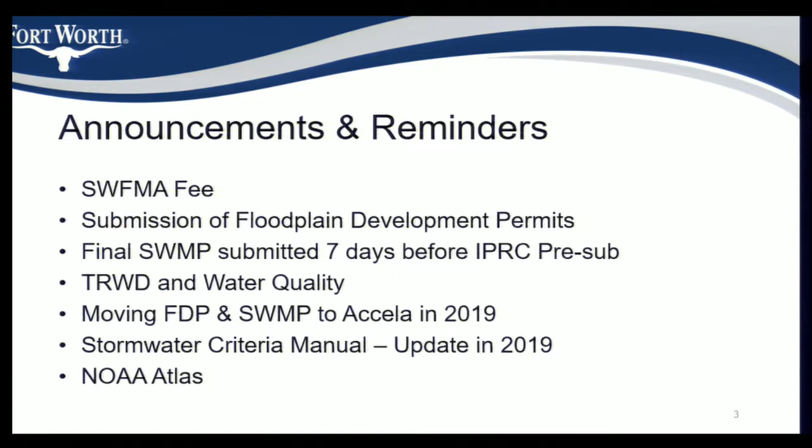So the new maintenance agreement recording fee is $635. You need to bring a check made out to the City of Fort Worth with the 3 original hard copies that you submit to the Planning and Development Department. We'll continue to provide review of the electronic exhibits ahead of time to try and make sure that when you actually get to the point where you have to record your maintenance agreement, it moves smoothly.

There is a procedure and a guide available online. Make sure you write down that link. If you have any questions, you can email us at swifma@fortworthtexas.gov.

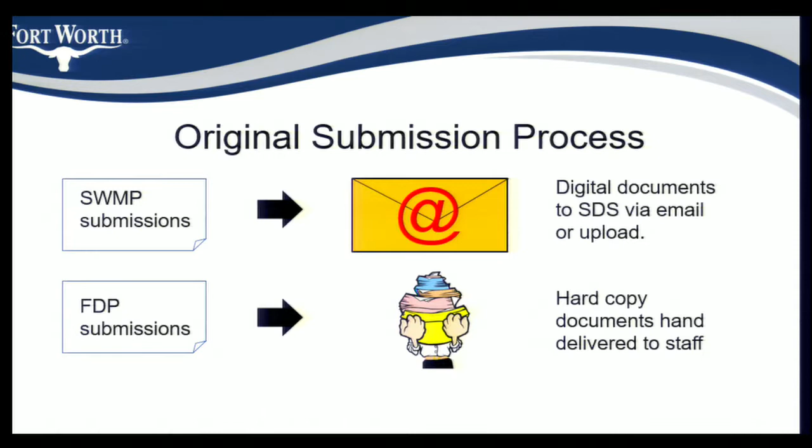So about the middle of August, late August, the Stormwater Development Services Group started accepting the iSWM as well as the floodplain development permit. Previously, you had to submit all your floodplain development permits hard copy to the floodplain team. As of August 20, you can email it to us, or you can send us a link to download it or upload it to Buzzsaw the same way you would an iSWM plan.

At least the processing and submittal process should look and feel like a stormwater management plan. So we're basically going electronic with the floodplain development permit at this point. It's being tracked the same way that we track stormwater management plans.

I did want to just touch on how those two submittals come in. Make sure you don't combine them in the same PDF. If, for example, the floodplain development permit is an appendix to the iSWM plan, our tech won't catch that, so you might end up delaying yourself by not making it clear that they're two separate submittals. It just comes to the same team now.

As of October 1st, I think, actually let me back up a little bit. So there was a group of people that were getting together to talk about the infrastructure delivery process, so all of the developer-led infrastructure improvements. There's been an ongoing coordination, I think a Six Sigma project, to find improvements and compress the time frame in which you can get in and out and get to construction.

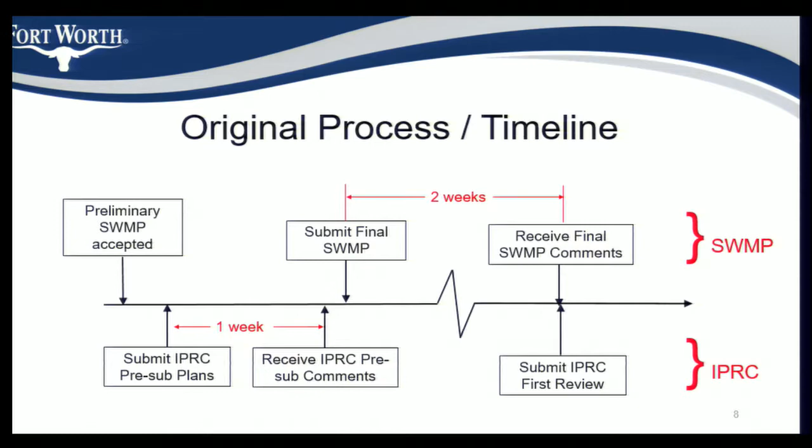One of the items that came out of that was having the preliminary storm management plan accepted and the final storm management plan submitted 7 days before pre-sub. Previously, it was just the preliminary storm management plan, and then you could move on to pre-sub. But the way it's working now, and we've been giving a bit of a grace period, so you probably have received a reminder if you haven't met that criteria.

So from here on out, it'll work more like this. So accepted preliminary and a final submitted 7 days before pre-sub. And the idea here is that if the timing works out, then you'll actually end up with pre-sub comments and final plan comments about the same time.

It also allows us opportunity to take a look at any updated models or additional information that's in the final and provide a more informed review of your infrastructure plans. Hopefully what this means is less compliance reviews at the end of the process and a faster route to construction.

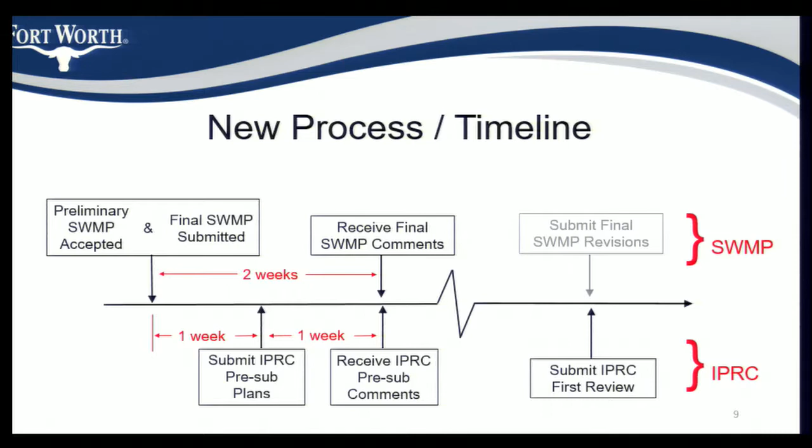So if the timeline that I sketched out there was a little confusing, the main takeaway is that preliminary needs to be accepted and final needs to be submitted 7 days before IPRC pre-sub. That's the main shift. Everything else, all the other links between storm management plans and infrastructure plans, remains the same.

Part of that process shift, I also hope, means that we can draw a better distinction between infrastructure plan review and storm management plan review. What we often see is a complete civil set submitted with the final iSWM plan. But if we're reviewing your final iSWM plan and your infrastructure plan set, we don't need to be doing 2 reviews. You don't need 2 sets of comments.

So as best we're able to, we'd like to see the construction plans move through IPRC, and more of the H&H modelling, more of the concepts and the exhibits in the iSWM plan, if that helps.

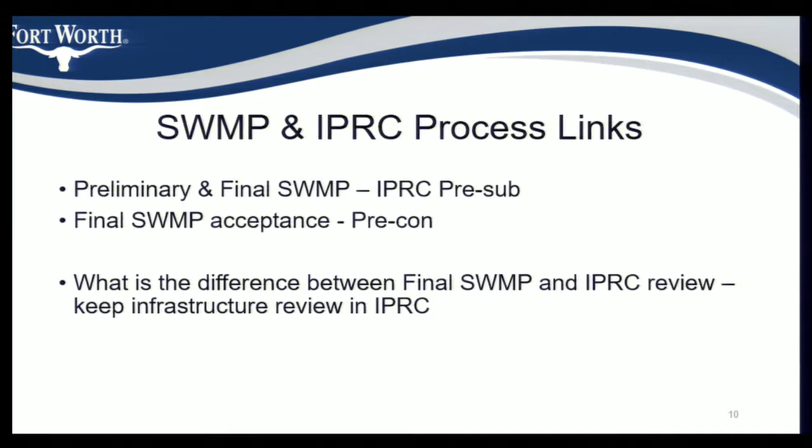So the Tarrant Regional Water District has published their stormwater, their water quality guidelines. I just wanted you to be aware of this because they've made a shift from grey infrastructure, things like Stormceptor units, to green infrastructure. And so when you're laying out your project site, you need to consider that green infrastructure, those bioswales or those other elements, as part of your early site planning work.

If you have any questions about the TRWD water quality requirements, there is the guidance document, but you can also contact Brenton Dunn with TRWD.

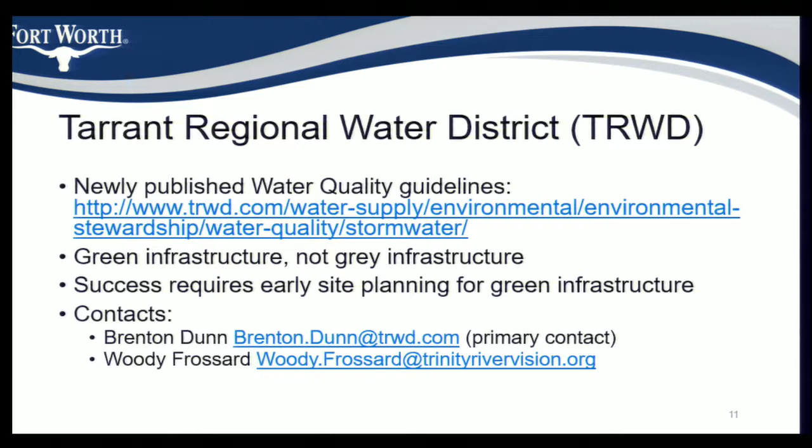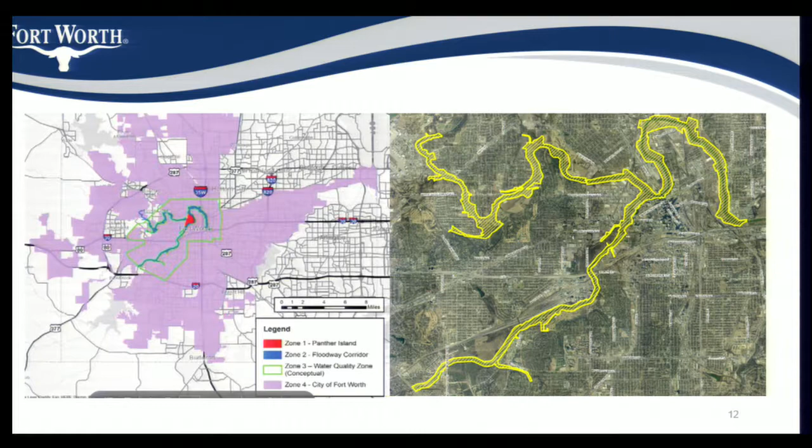There's a general process for just their water quality review. I know some of you probably have other questions about permitting new outfalls and that overall process, but just for the water quality review, they would like to see that you submit a concept plan, just a site plan with your location of your green infrastructure, and then work with them to find consensus on that concept plan.

Once you get to that point, agree on a concept, move forward to the detailed design calculations. They, of course, need to be signed and sealed by a PE. You might need to work with the landscape architect to refine some of that design. Once you reach approval of the design, obviously they issue your permit as long as everything else is in place.

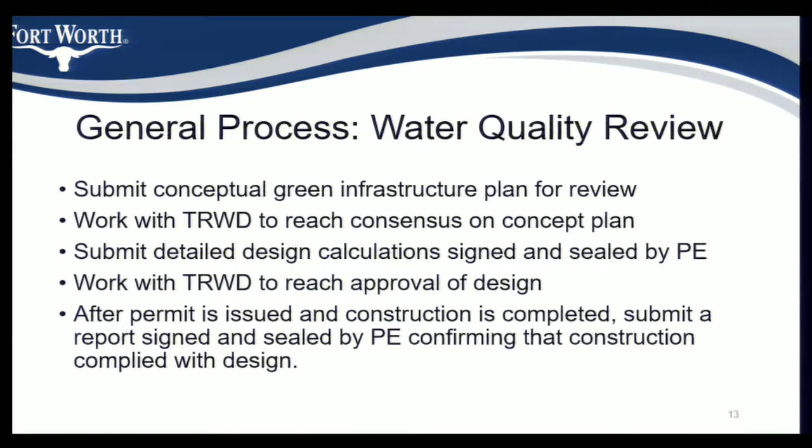But once the permit's issued, you still need to go back and submit a report confirming that the construction was done in compliance with the approved plans. If you have any questions, again, reach back to TRWD and they can provide additional guidance or direction on how to do that.

So just briefly, we are trying to move most of our permitting activity, most of our review activity to an Accela platform. The idea being that you can submit your documents online. It gives you a clear path on how to get through the process. There's workflows. It's structured for performing reviews.

And so we're looking at shifting most of our work to an Accela platform, building on the success that IPRC has already had with the infrastructure plan review work.

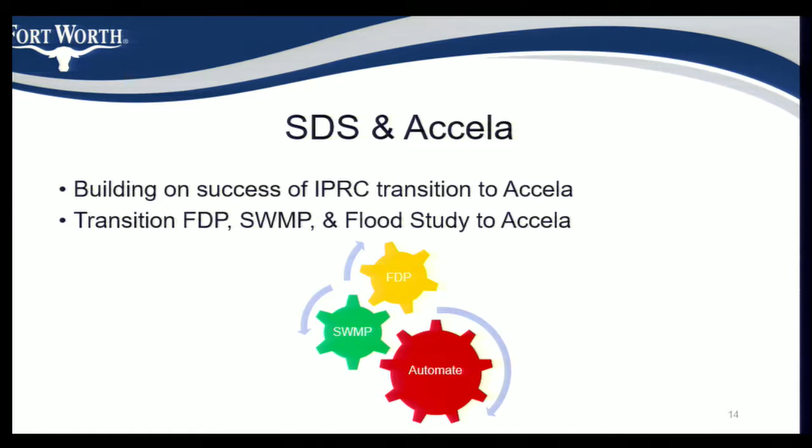We do plan to update our stormwater criteria manual in 2019. There's really just some refinements and clarifications we're looking to make to that. But if you have any feedback that you want to offer, then you can contact myself, Clair Davis, or send us an email at sds@fortworthtexas.gov, and we'll add that comment or that item to the list of things we're looking to address.

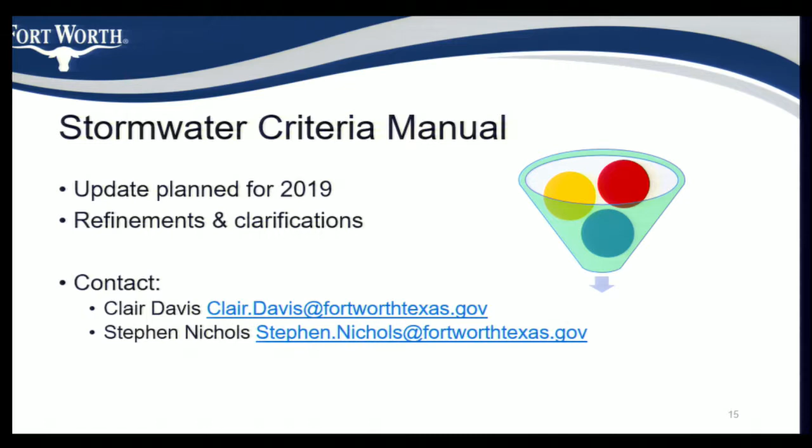Of all the possible updates, it's probably the local floodplain policy that we're currently working on that would have the potential to make more substantial changes to that manual.

You might have already heard, but the NOAA Atlas 14 for Texas is now available. The rainfall intensities in our area really haven't changed much. They're marginal at best, a tenth of an inch here or there. It's really areas in Austin or the coast that have substantial changes to their 100-year rainfall depths.

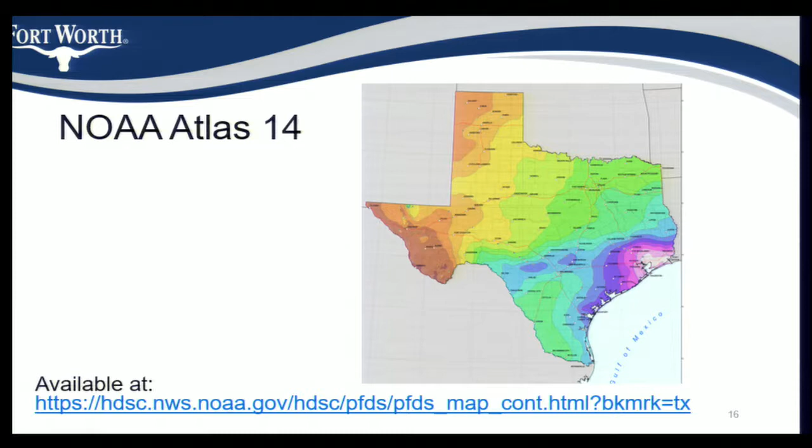Stormwater works with a group we refer to as a Stormwater Liaison Committee. It's made up of a handful of developers and engineers that work with developers. When we have concerns, questions, or want to bounce ideas off people in the development community, we take things to them and discuss it. One of the things that came out of that committee maybe a year ago was the idea of trying to find out what causes a review iteration.

We in Stormwater Development Services have been able to turn things around pretty quickly, typically within a 10-day goal, but then how many review iterations is appropriate? Is it 2? Is it 5? 5 seems high, maybe 2 is reasonable. But the idea was we want to focus on reducing the number of iterations we have.

So we worked with the liaison committee to come up with the idea of taking a sample of 20 civil plan reviews, a mix of final, preliminary, and construction plans. We had 2 consultants look at these independently, one selected by the city, one selected by the liaison committee group. We evaluated these reviews to try and figure out what caused that review iteration - is there something we can do to change the way we're doing business to reduce the number of iterations? Ultimately, the idea is that we're saving time and money for both the community and ourselves.

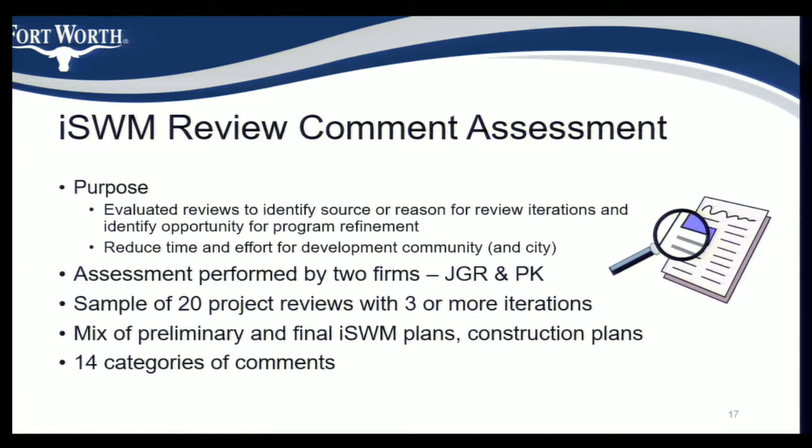Of the sample 20 projects, each of these exceeded 3 review iterations. Most of the firms represented were people that we do business with almost on a daily basis. A few of them we don't see so often, and the one-time customers are probably folks from out of town or out of state.

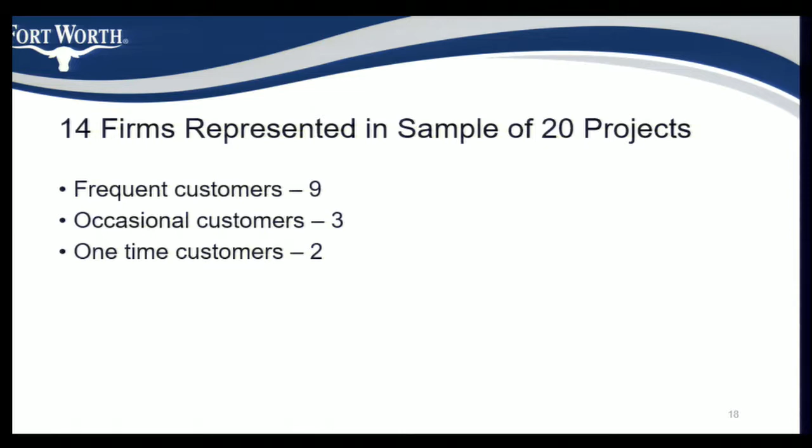A summary of the findings from those 2 reports, which are available if anyone wants a copy: they found that in almost all projects - actually all projects - were affected by previous comments not being addressed. Almost all of the projects were missing data that would have been required to complete the review. And a little over half didn't meet our standards or had design errors on plans.

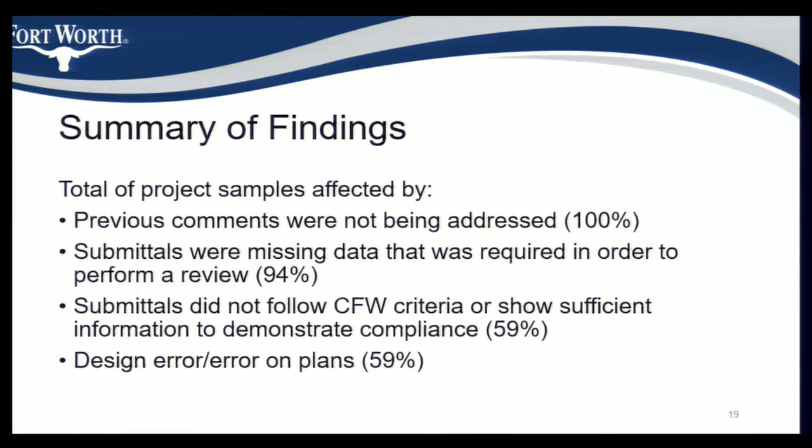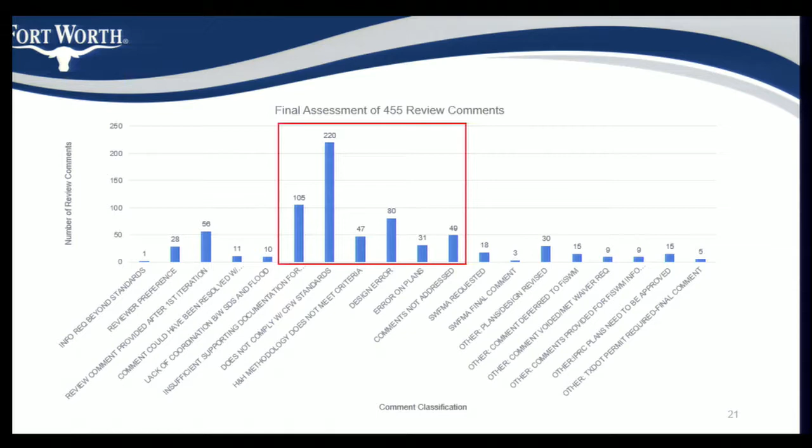So where that's leading me is our examples. You can see that about half the comments across all the reviews fell into 'doesn't comply with standards,' and that's why I end up with this comment. I'll let you quickly read through that, but I think you get the idea.

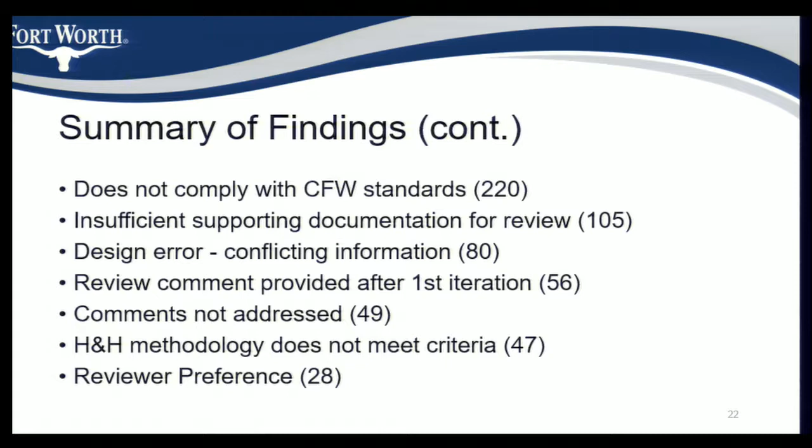So with that in mind, we've prepared a series of design standard examples, things that we see most commonly. Almost every infrastructure plan set that comes in has comments that relate to these items. Erin's done a great job of putting these examples together for us. As our Stormwater Development Services liaison with IPRC, she's probably at most of the pre-sub meetings.

So manhole locations are obviously important for access and maintenance. As design engineers, you're designing infrastructure that is ultimately handed over to the city, at least if you're working within the IPRC process. And so we need to make sure that we can access, clean, maintain, and operate the system moving forward. Manhole locations are important to that.

Something that's come up recently is concerns about manhole locations at the upstream end of the storm drain system. There's been some debate over what constitutes access at the upstream end. Often an inlet is okay for a short run, but usually within 100 to 200 feet of that top inlet, there needs to be a manhole added.

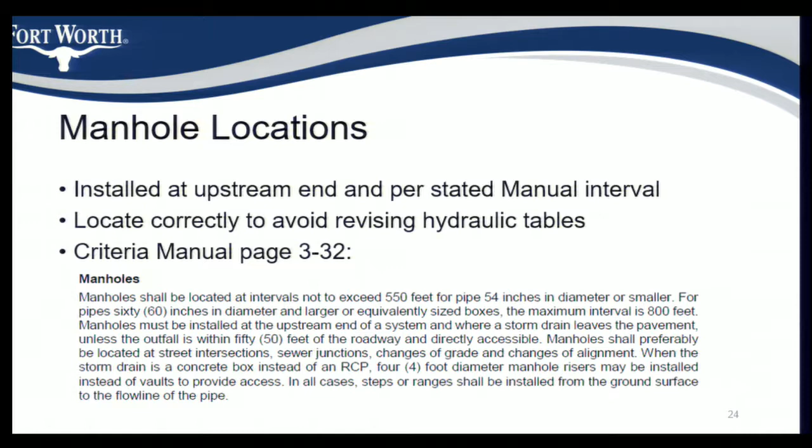I haven't added this to the presentation, but the ability to retrieve that hydrojet head is also tied to Fort Worth's approach - what people have referred to as unusual - of matching flow lines in our storm drain systems. By matching flow lines in our storm drain systems, it makes it a lot easier to retrieve the hydrojet head as well as the camera equipment.

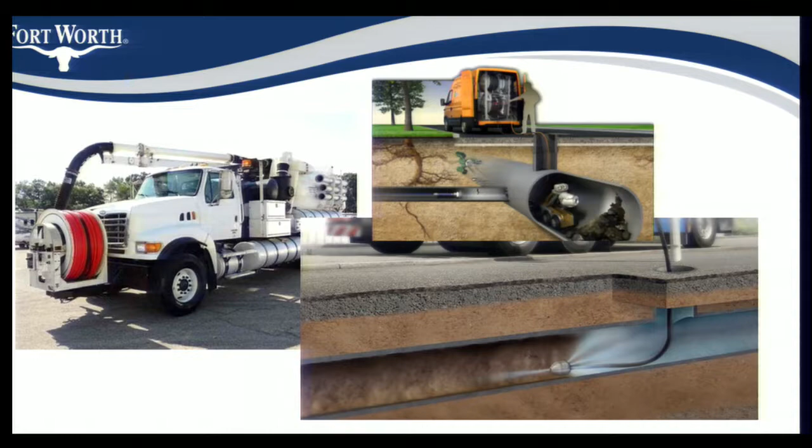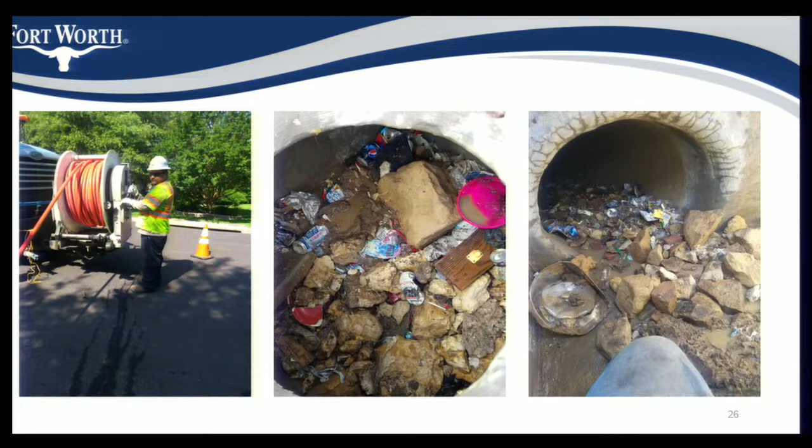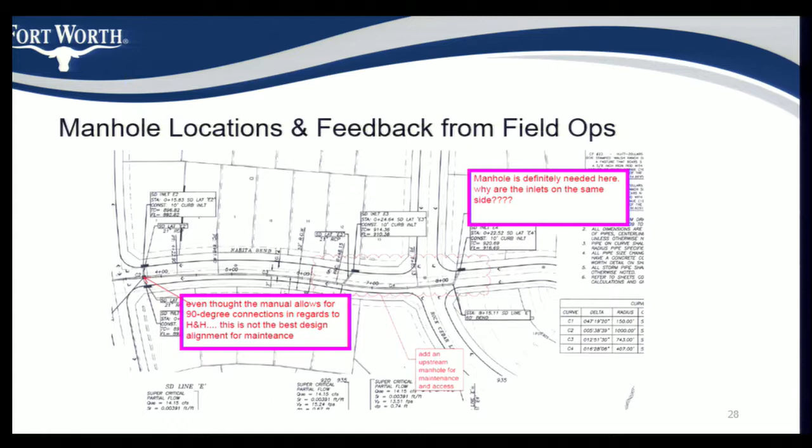This is similar but slightly different. Our field ops provided feedback about this configuration and indicated that moving the jetting equipment through this bend here was more difficult, and therefore they would like to see a manhole at that location. So the point I'm trying to make is how you define a manhole being required at the top end of a system kind of depends on the design of that particular system. And again, it's tied to our ability to maintain, clean, and operate that storm drain.

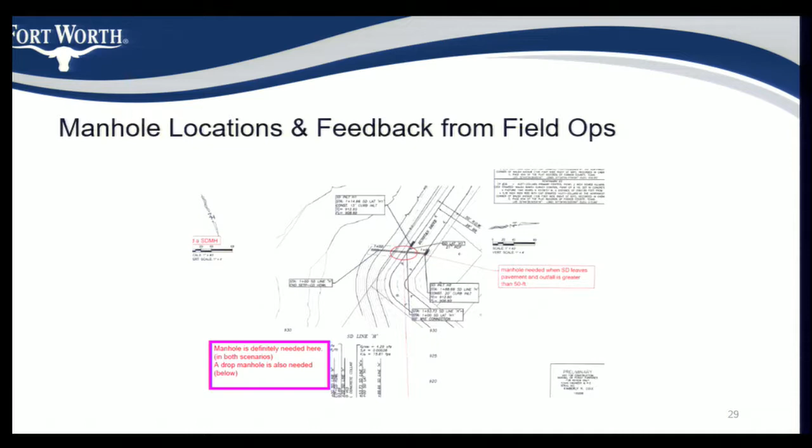We also need a manhole located usually within the pavement, or certainly within 50 feet of the pavement, where we have an outfall that's difficult to reach. This is a good example where you've got probably a 20-foot drop to the flow line. That would also need to be a drop manhole to make that work, I think.

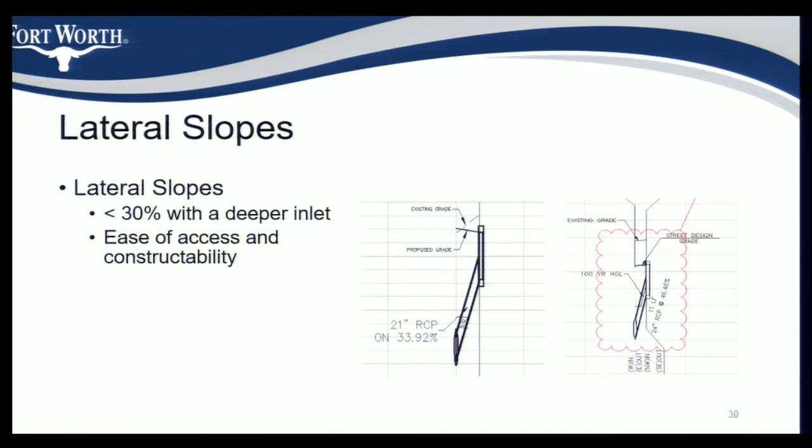On lateral slopes, we don't have a specific published criteria for this, but working with our field engineering and field operations, the upper limit is really 30% on your laterals, both from an access and a constructability standpoint. We did have one come in at 75%, and our field engineering guys told us they really couldn't even retrieve their camera equipment from that. Is that right? Yep.

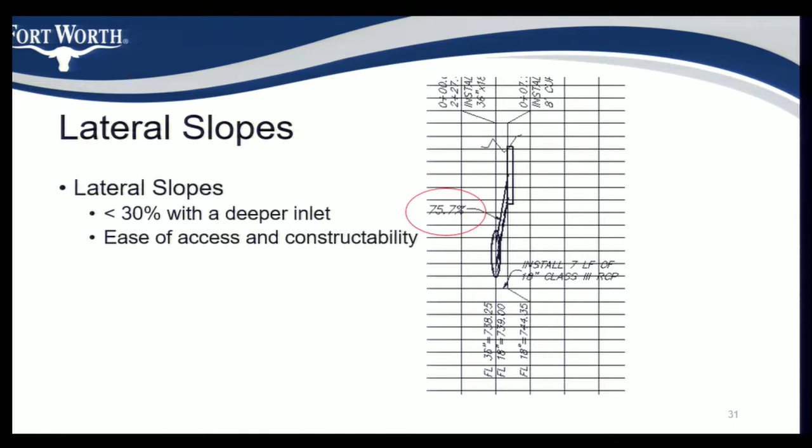I hate to use the word pet peeve, but it might be one of mine. The lateral connections, I think every single plan that I've seen first time, they come with a lateral connected at the center of the inlet. I don't know if that's because it's easy to draft that way or that's just the way it makes sense to the designer. But City of Fort Worth inlets, our standard 10-foot inlet has 2 access openings, 1 at each end.

So the idea is that the lateral connection needs to be plumbed in, aligned with the access opening, so that when our field op guys are out there trying to get that jetter hose through, they've only got one vertical 90-degree bend to move through, and they don't have to get that hose through a vertical and then a horizontal 90. It makes it difficult to push the hose through and then retrieve it.

Our standard inlets on new infrastructure are 10, 15, and 20 foot. The manual does make reference to a 5-foot inlet. One of the reasons that the 5-foot inlet is in there is because it's not just development projects that use our manual, it's also used on CIP projects. Citywide, this is our stormwater criteria manual.

Based on some analysis, some modeling, I think they actually used an InfoWorks model in Central Arlington Heights, they determined that all the street projects that were going in and rehabbing the pavement and adding 10-foot inlets instead of the 3 and 5-foot inlets that previously existed, that work was actually moving flooding problems around from one location to another.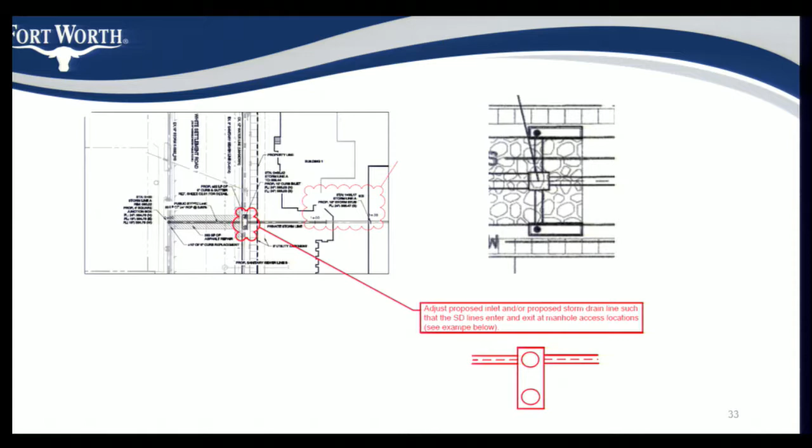This is actually on my drive home. This is a 40-foot inlet. A 40-foot inlet's also not really a standard size.

A little bit on lot grading. I won't go into too much detail. Maybe a year ago, Greg Simmons had led a conversation, a series of meetings about how we interpret our lot grading standards and how we're going to apply those moving forward. The findings of all those meetings were published in our April newsletter.

But most of the contention was around having to provide a drainage facility in the middle of the block where you have a type B or type C that drains to the rear, and providing a drainage facility along the common property line.

Our manual does define type B as breaking at the rear building line. That's also consistent with the original 1970s HUD guidelines. The main difference there is that house sizes and shapes have kind of changed in the last 50 years, and so that rear building line is actually a lot closer to the rear property line than what it used to be.

Anything that's closer to the right-of-way, closer to the front building line, we really consider more of a quasi type C configuration, just because you have most of the impervious cover or the rooftop draining to the rear.

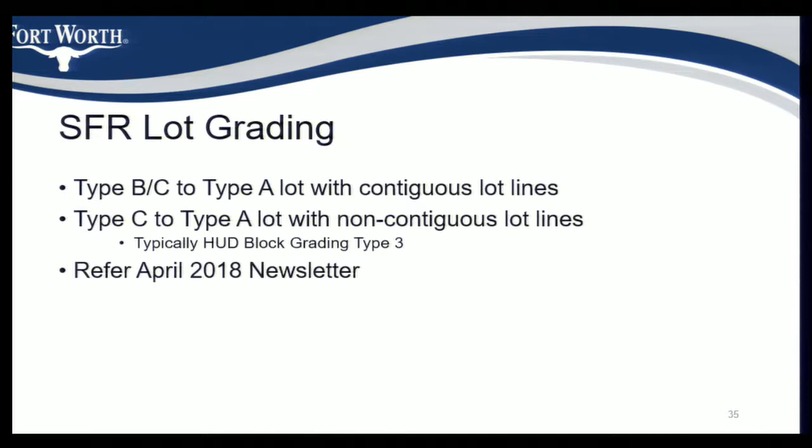So I guess this is an example of the kind of configuration we're talking about, but it's also an example of the contiguous lot lines. And so where we do have the break at the front property line, our standards require the contiguous lot line or the contiguous swale to move through.

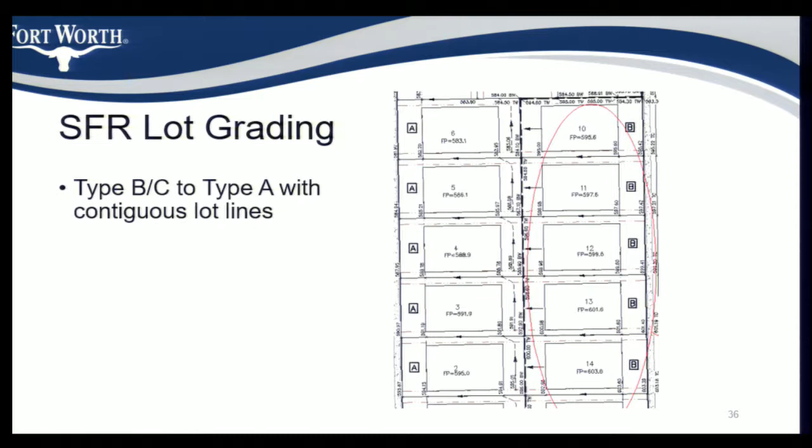What we try to avoid is non-contiguous lot lines. By having them continuous, it's a lot easier to not have a rear drainage infrastructure, some sort of drain or swale, or maybe a swale that someone fills in over a few years.

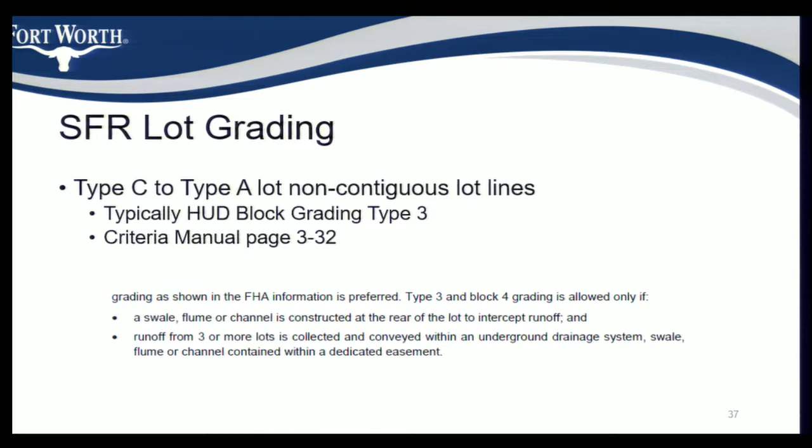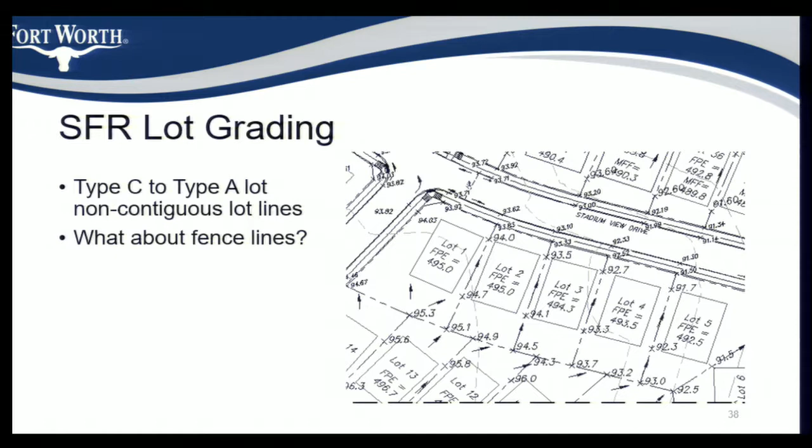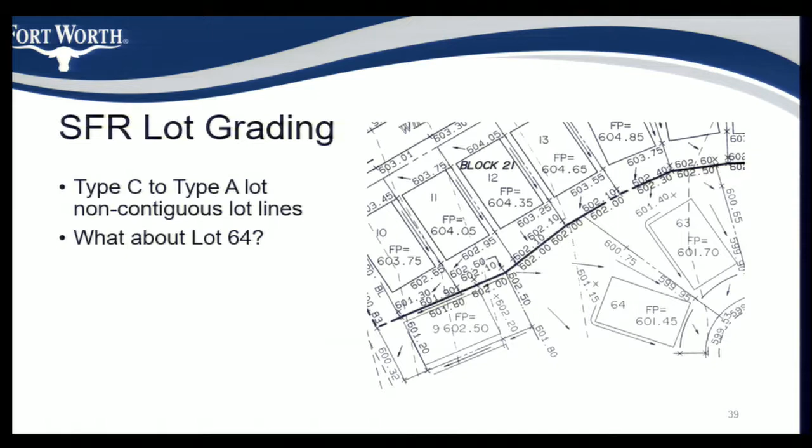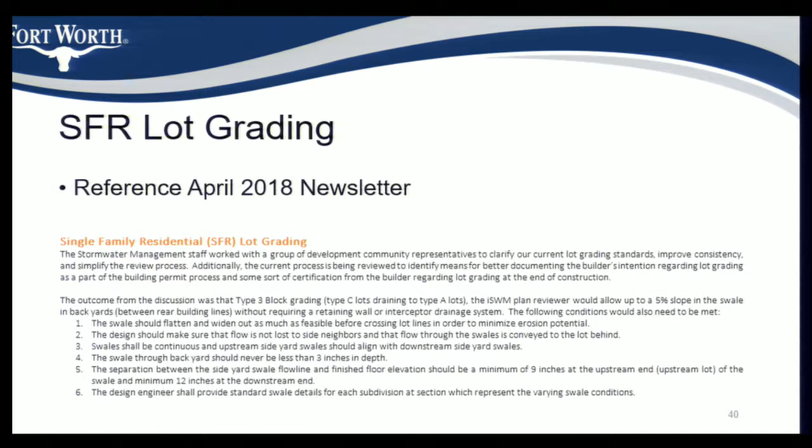I want to talk a little bit about erosion controls at outfalls. This is something that, again, on most plan sets that we see, the erosion control at the culvert or the storm drain outfall is either too short, not provided, or too narrow. It just doesn't really meet general design guidance.

It's also important to evaluate your storm drain outfalls for more frequent events, not just the 100-year. Sometimes the 100-year tailwater masks the outlet velocity or the maximum outlet velocity.

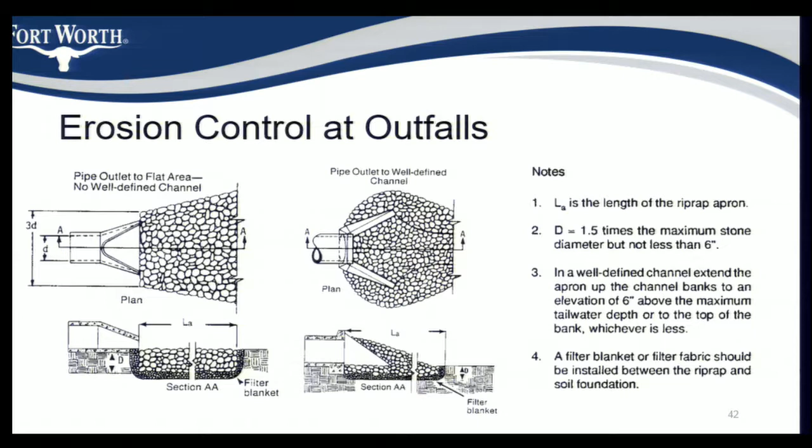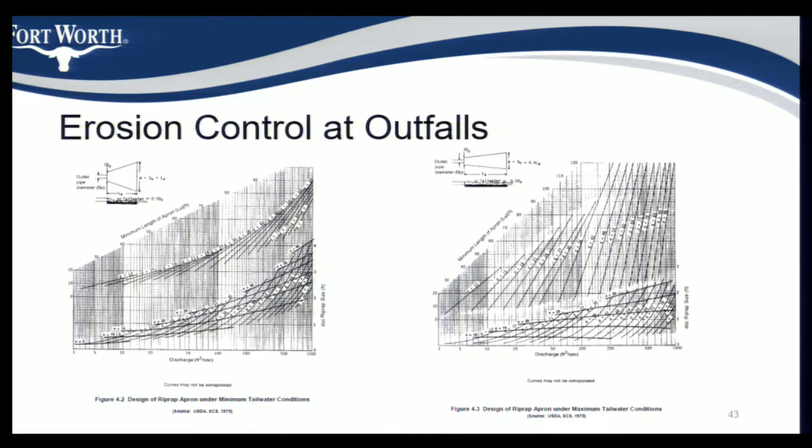The iSWM, the COG's iSWM hydraulics manual, provides specific guidance on the length and width of a riprap apron. I won't read through that for you, but it's out there and available as a design guide. It also provides some nomographs for you to determine the expected length and width of that apron, with some examples of why we might want to see those aprons appropriately sized.

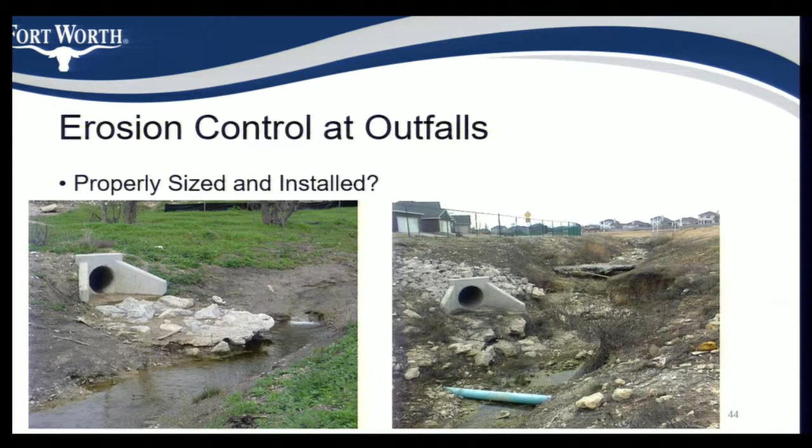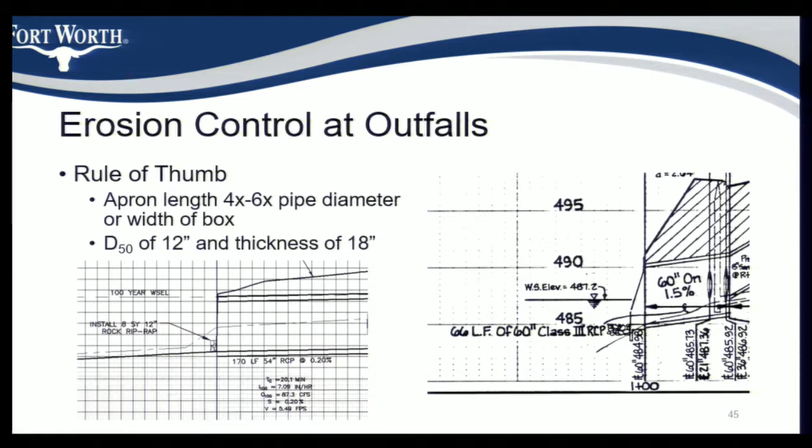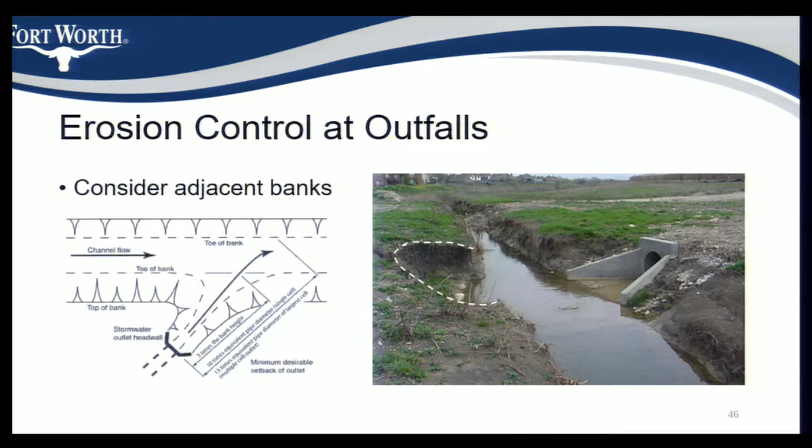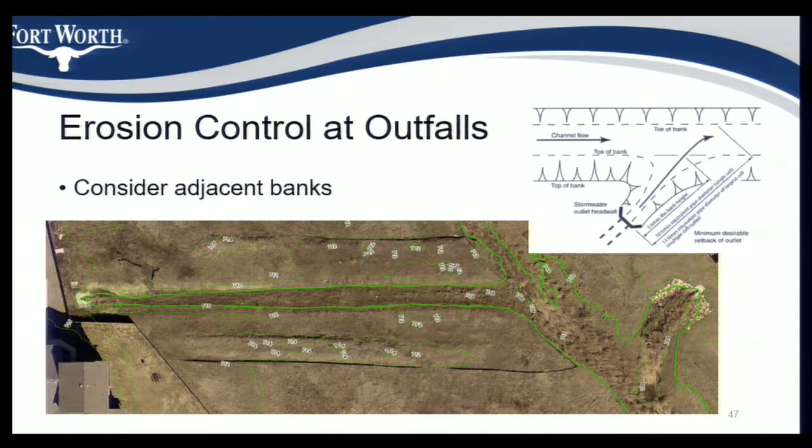Just another reminder to consider tailwaters other than the 100-year storm when you're determining your velocity at your outfall.

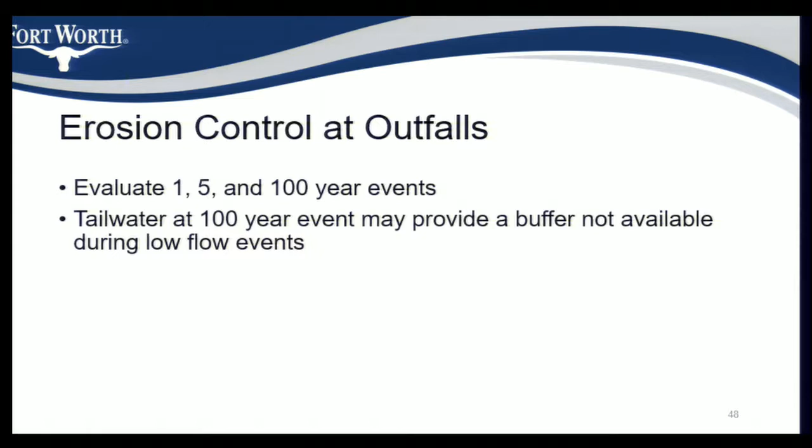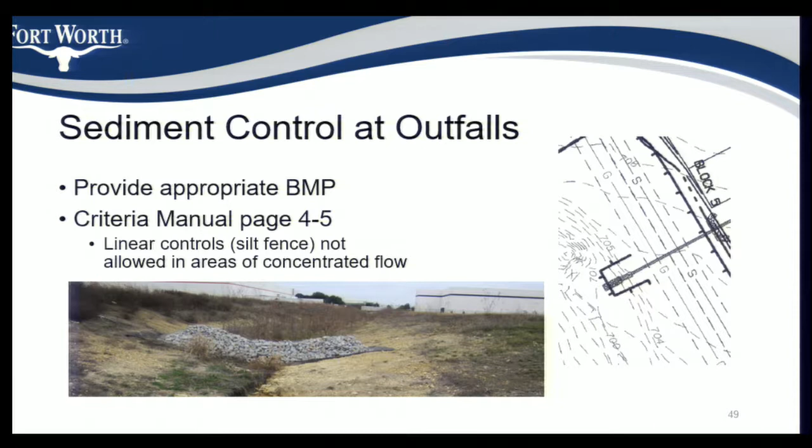We grabbed this example of a temporary sediment control and outfall - just a bit of silt fence around the pipe. Silt fence is great when you've got broad sheet flow, but when you've got concentrated discharge, silt fence is going to fail pretty quick. As you can see in the photo, a rock check dam in an outfall channel from a development is the kind of thing you'd normally want to propose or show at your outfalls. Silt fence is good - these are some silt fence retaining walls, they work hard, but they're not what you want to place at an outfall from a storm drain system.

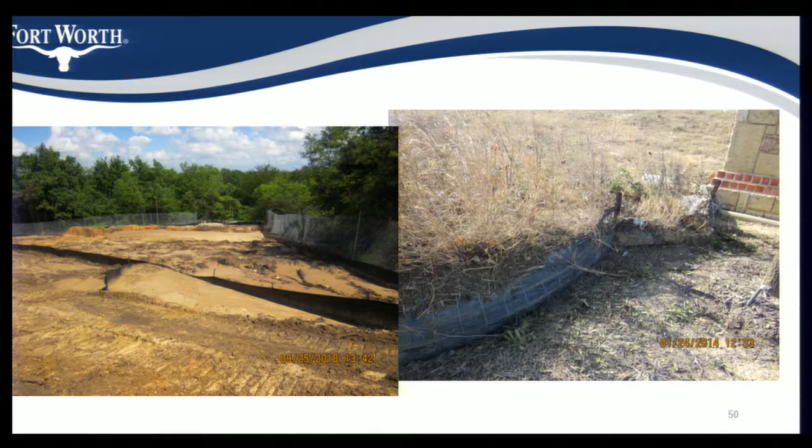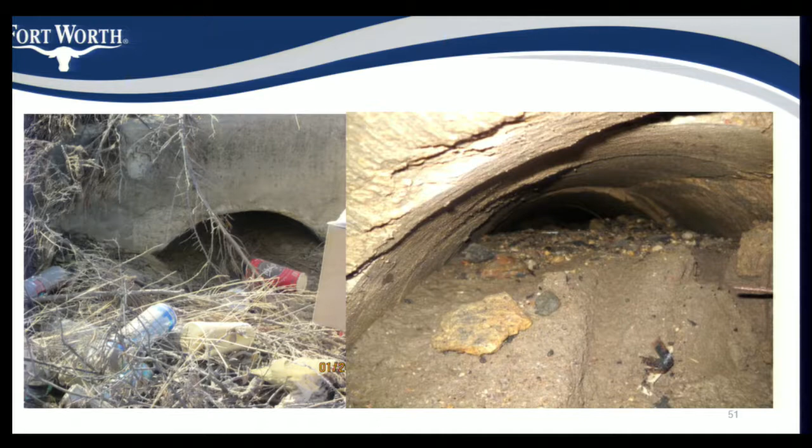One of the reasons we harp a little bit on erosion control is that erosion on your project site typically becomes sediment in the storm drain system downstream of your project, and either your contractor or the city is going to have to clean out that sediment. Here are a few more photos of sediment accumulating at inlets to culverts.

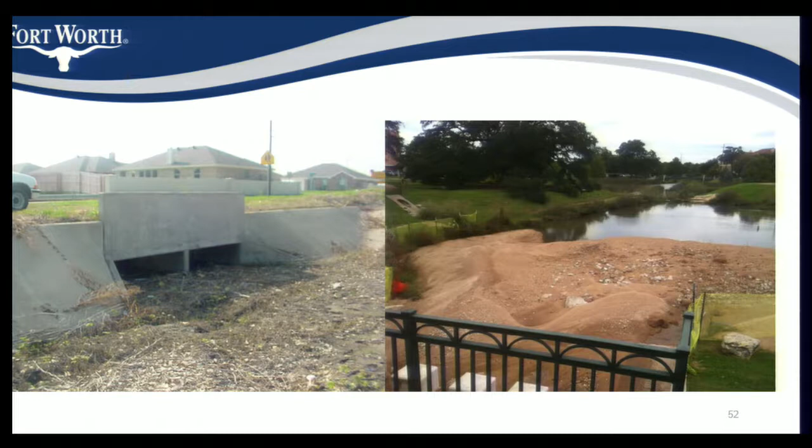We also want to touch on placement of silt fence. On this project, they've placed their silt fence along the property boundaries, and that's pretty typical of a project - to delineate physically the boundaries of construction. But in this case, there was about 13 acres that drained to that point, and the silt fence actually created an obstruction.

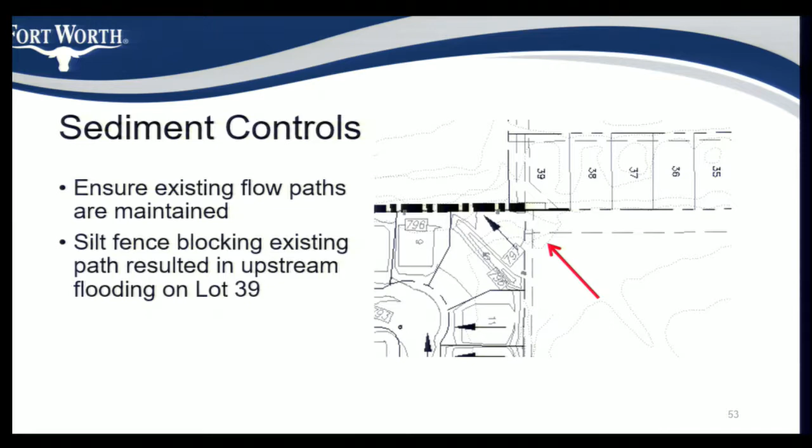We've had the wettest September on record, and October looks to be about the same - in a space of 6 weeks, we got 2/3 of our annual average rainfall. So any flaws in drainage designs showed up pretty quickly, and then someone called the city about it. We went out there, and the silt fence had caused water to pond about a foot deep and then flow through this person's property. They were pretty concerned that their house was going to flood.

Actually, Aaron, can you hit play on that video? Yep.

We couldn't make it to the site during the rain event, so the homeowner was quite happy to take a video for us.

But you get the idea.

It's actually also probably not a bad example of how not to design a subdivision, or maybe forgetting to pick up offsite areas, because there's about 13 acres draining to the property corner, and that's what the silt fence diverted onto his property.

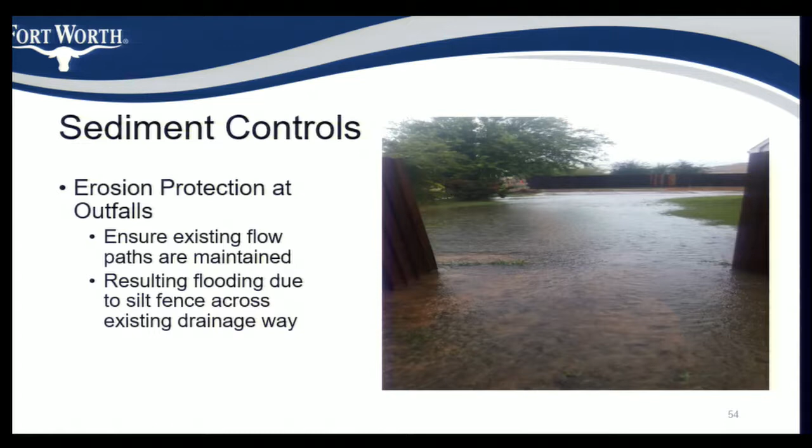You probably hear from us pretty regularly through your IPRC plan design that we need you to take your storm drain outfall to the flow line of the creek, or at least manage your runoff from your outfall to the receiving stream to make sure there's not a substantial erosion problem.

So what we're looking for is to manage that erosion potential all the way to the flow line of the receiving stream, or all the way to the adequate outfall.

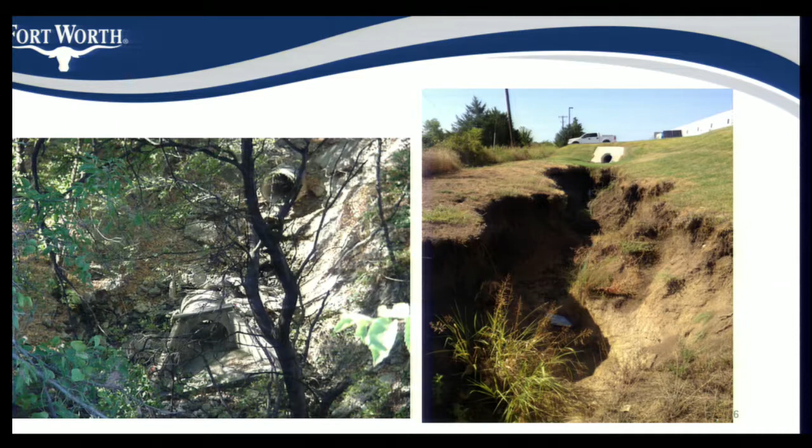This probably wouldn't work. It probably would look a little bit more like that after some period of time, either having eroded the downstream embankment or maybe the headwall's fallen off. One of the reasons we typically talk about taking your runoff to the flow line is because we have plenty of examples around the city where not managing that erosion control all the way to the flow line has caused infrastructure failure.

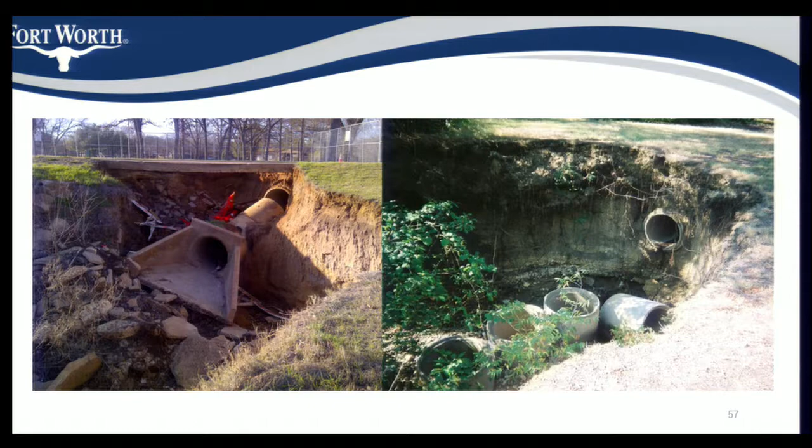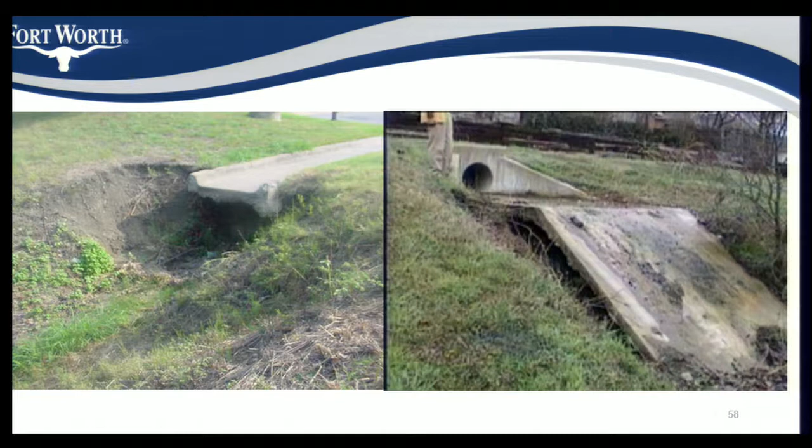It looks like they attempted to manage their erosion control to the flow line on the right. Maybe some curbs on that concrete apron would have helped. Just an example of the kinds of plans; this is actually a good example. They've taken the outfall to a fairly flat grade to a drain swale.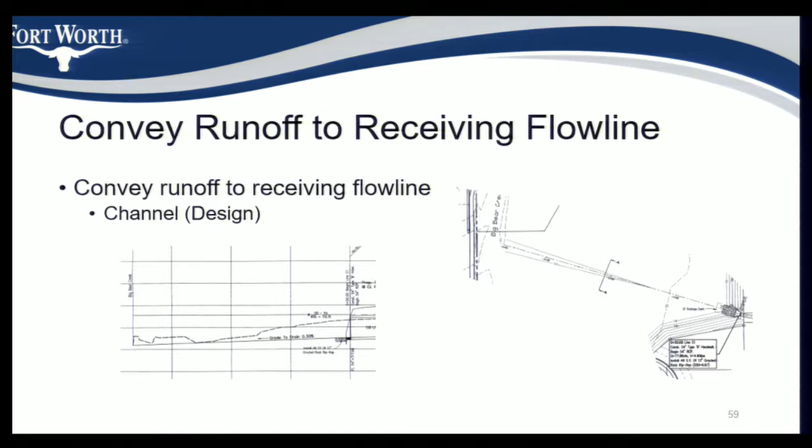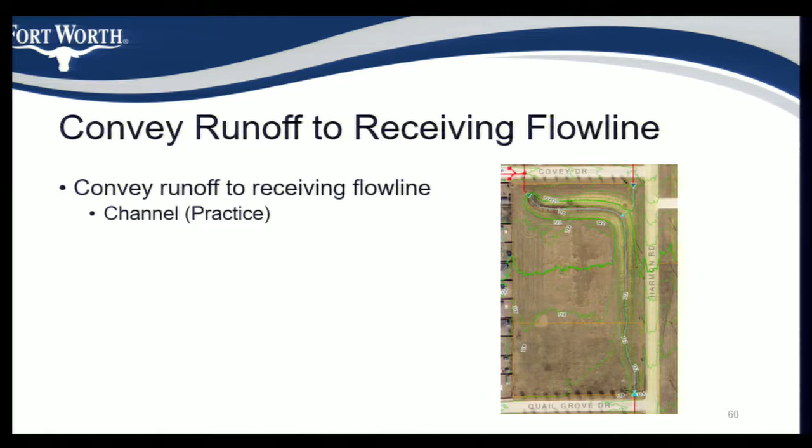It's probably not the best screen capture. It's a little small on this slide, but you can see they've taken a channel. They could have just outfalled, but they've actually taken a channel and directed it appropriately to the next pipe. And that way they've actually managed that flow fairly well to their outfall.

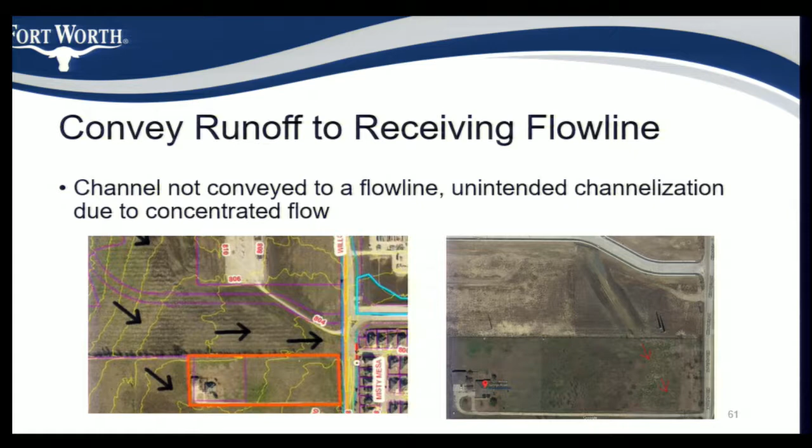The property owner was actually pretty reasonable about it all, and I think the development's working with them to resolve that. But just something to keep in mind, taking your concentrated flow to a concentrated outfall usually makes it easier. Just an example of some erosion that's occurred because the downstream system or the erosion potential wasn't managed.

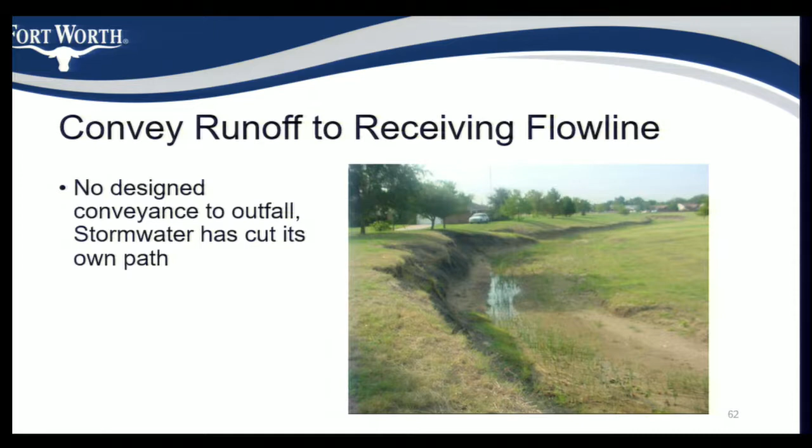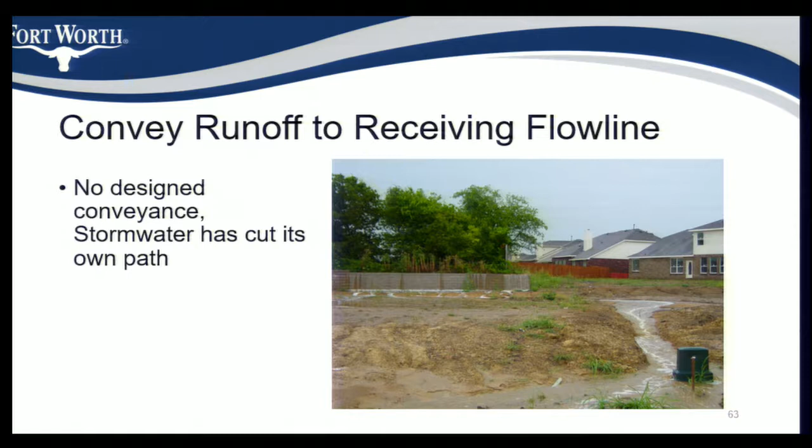Similar sort of deal. The outfall was upstream of this, and you can see that in this picture, you really just have uncontrolled overtopping and then runoff. In aerial, you can imagine in pre-developed conditions, it was just a field. After development, they've installed their storm drain systems, they've collected it and concentrated and discharged on the field to the north, and that runoff has cut its own channel.

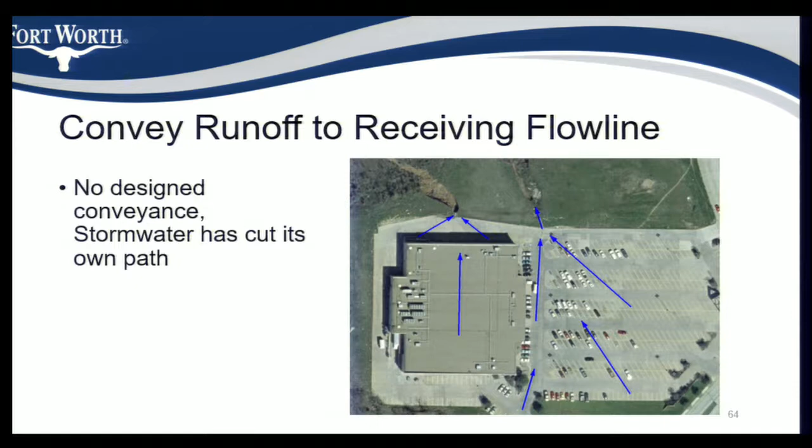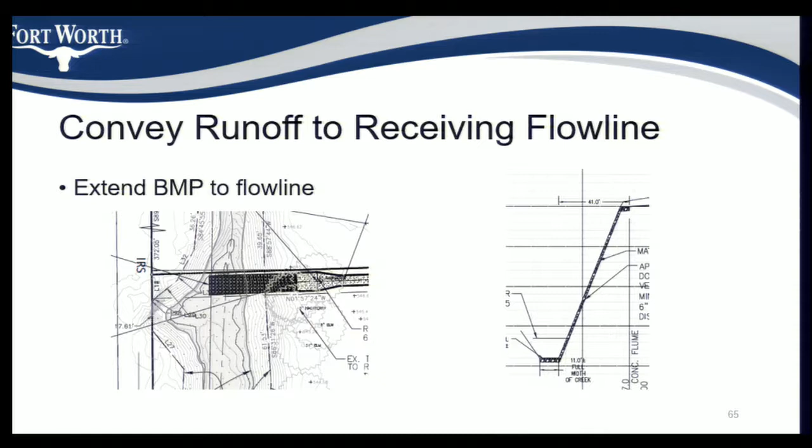This is an example of a project we worked with in the last few months. They only have a flume conveying maybe 5 to 10 CFS, and rather than installing a storm drain system, they ended up using grouted rock riprap down the fairly steep embankment. But the point there is they've managed their erosion potential all the way to the flow line of the creek.

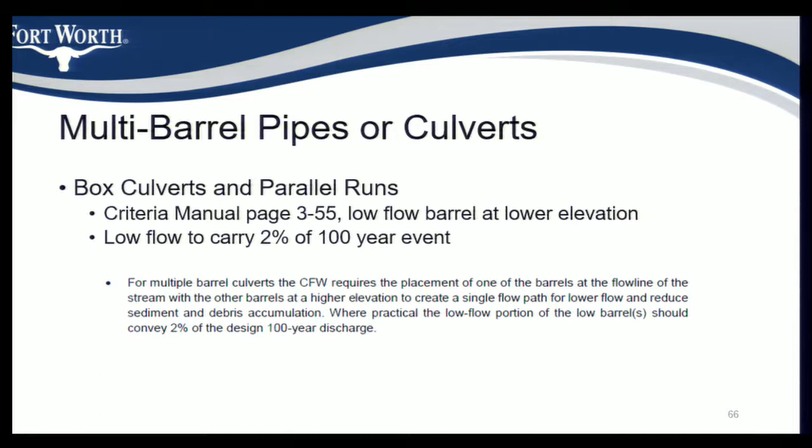With multi-barrel culverts or pipes, I just want to remind everyone that when you have multiple barrels, drop one of them just a little bit lower to match the flow line of the creek or whatever channel you're working in. It provides high velocities in low flow conditions and therefore less sediment accumulation. The higher level culverts also provide potential for wildlife. Don't laugh when I say this, but they actually may provide wildlife access across major thoroughfares.

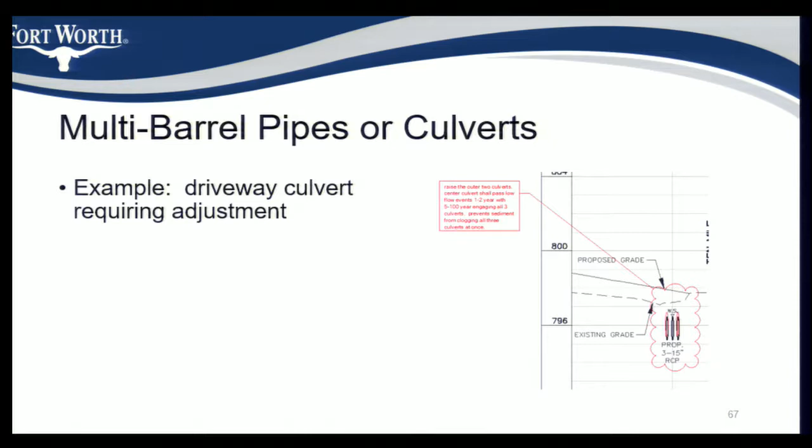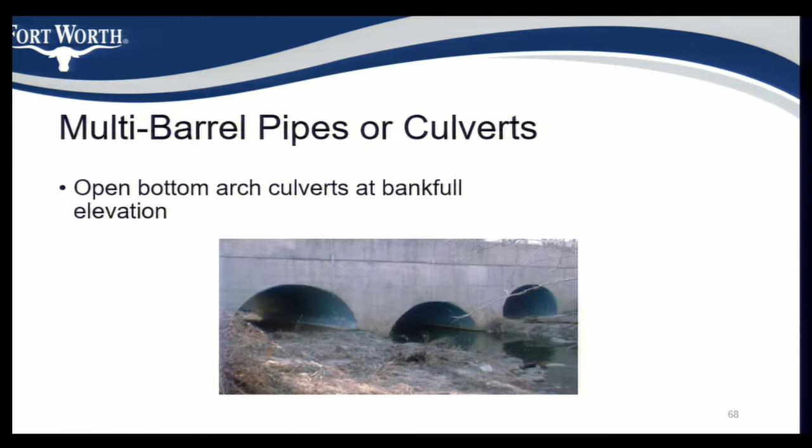So here's another example. You can see that the low flow arch is a little lower, and you've got your higher bankfull stage elevation for the other culverts or the other barrels. Another example.

We have standard hydraulic tables for pipe calculations and for inlets. Make sure you use our standard tables. It makes it a lot easier for the reviewer to confirm you've met our standards. We're all used to looking at the same columns and the same tables and just checking for those particular thresholds or those particular errors we're used to finding.

Usually if the hydraulic table has changed or if there's an error in the hydraulic tables, that IPRC review is typically kicked back to the reviewing engineer so that we can check the H&H calcs. And so if we can make sure our tables are in good shape moving into the infrastructure plan review, then that cuts down on the number of compliance reviews on the back end.